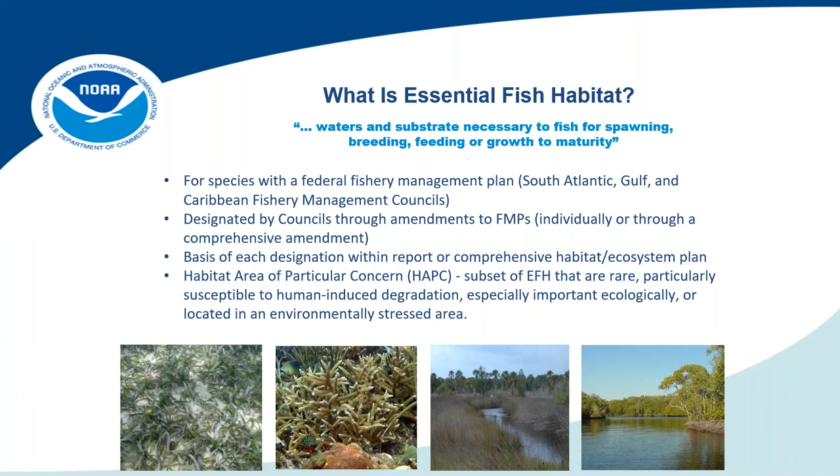So why do we have to protect so many different kinds of habitats? It's basically because any given fish species has a number of different life stages, and typically they will change the habitat they're living in based on what life stage they're at.

When they're first eggs and larvae, they're up in the water column. Then they will settle sometimes into a habitat like seagrasses, where they grow to be juveniles, get large enough, and then they may move off to a habitat like mangroves for a while and get larger still. At some point they become adults ready to reproduce and they'll end up on coral reefs. Because different species use different habitats at different points in their life cycle, we need to protect all those habitats so that the species can complete their life cycle and reproduce.

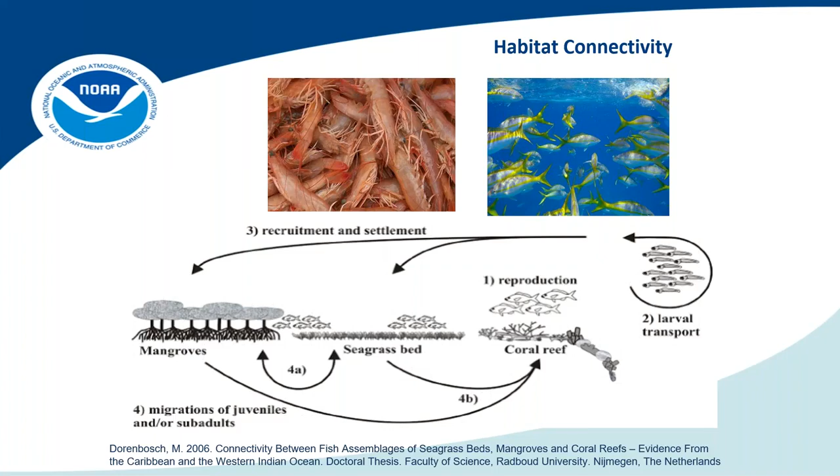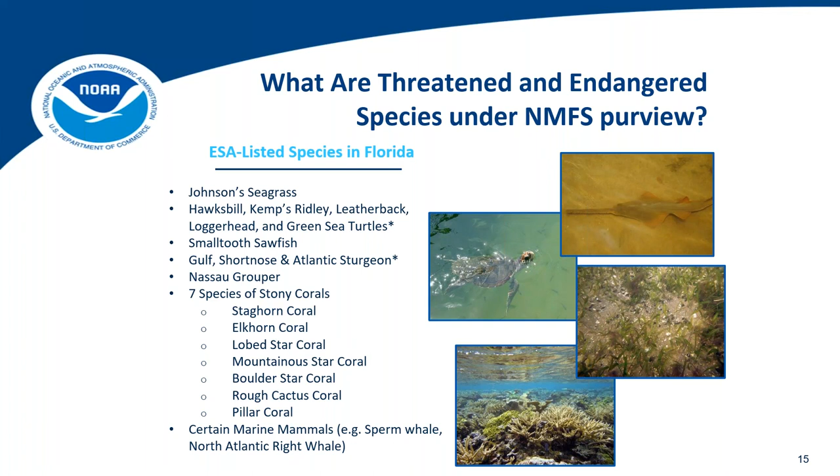So people get kind of baffled about why there's an ESA consultation and then another consultation for EFH. Part of the issue is that those two entities fall under two different pieces of legislation enacted at different points in time. The ESA was enacted first, and then EFH came into being later when they modified the Magnuson-Stevens Act. There's really two different processes, and you're dealing with two different divisions within NMFS when you do these consultations. Now, because of the nature of the funding agreement we have with FDOT, Jen and I do both types of consultations, although that is actually an exception to the rule.

If you were Joe Public going to the Corps to get a permit to build your single family dock, when the Corps comes to us, they would actually be dealing with two biologists, one from habitat conservation and one from protected resources, but that's not the case with FDOT. So it makes things a little smoother. There's more continuity because you're not dealing with two different folks.

EFH and ESA also have different timelines. We usually can get an EFH consultation done in about 30 days. ESA, if you go into formal consultation, that could be as long as 135 days. The other thing is we usually have the information we need to do the EFH consultation earlier in the process than is the case with ESA, because for EFH we just really need a good ballpark idea of how big the impacts would be, how much acreage would be involved, and what kind of resources.

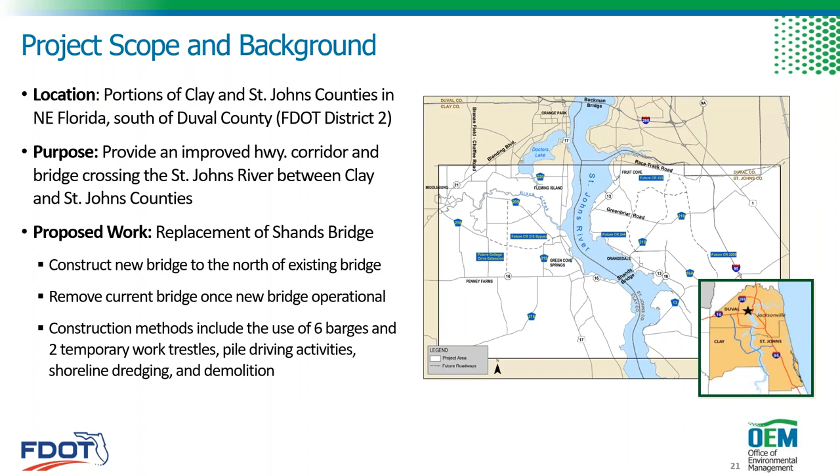Construction on the new bridge is expected to begin in 2022 and be completed in 2029. Construction methods with the potential to affect EFH include barge use, pile driving activities, shoreline dredging, and demolition.

In August 2005, FDOT distributed the advanced notification package to the ETAT agencies, including NMFS, the U.S. Army Corps of Engineers, the U.S. Coast Guard, and St. Johns River Water Management District.

NMFS responded to the advanced notification package as an ETAT member and provided comments through the Efficient Transportation Decision-Making Environmental Screening Tool. NMFS commented on coastal and marine resources, wetlands, and wildlife and habitat. NMFS also commented that the project may directly and indirectly impact EFH, as well as listed species under NMFS purview.

NMFS recommended an EFH assessment to comply with the Magnuson-Stevens Act and a biological assessment to comply with the Endangered Species Act. NMFS also requested avoidance and minimization measures, a stormwater management plan, and a detailed mitigation plan be prepared and provided for NMFS review and response.

FDOT used wetlands identified in the Wetlands Evaluation Report in conjunction with National Wetlands Inventory mapping and NMFS coordination to determine essential fish habitat associated with the wetlands and the tidally influenced waterways, including portions of Black Creek and the St. Johns River. There were several challenges associated with developing the methodology to determine the extent of EFH in the project area.

Some of these challenges were that this project entails a large geographic study area. There were many build alternatives under study, and multiple tidal and non-tidally influenced surface waters exist in the project area. This is important because in addition to submerged aquatic vegetation such as seagrasses, tidal wetlands are considered to be EFH, so this differentiation is used to help quantify potential EFH impacts.

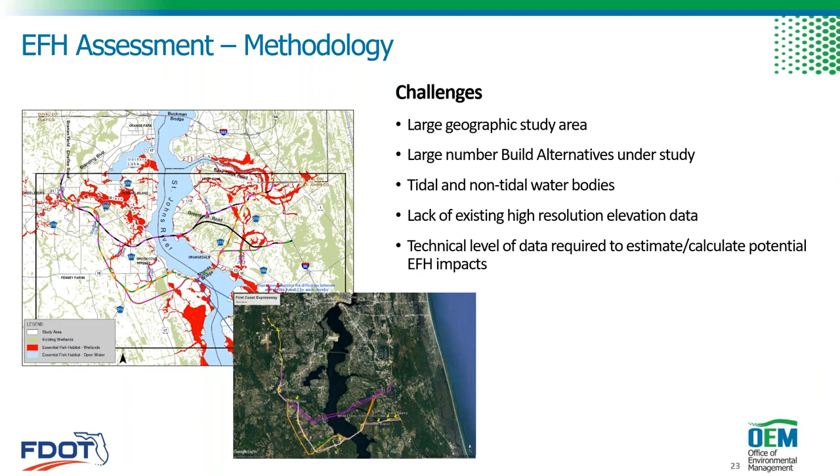In May 2011, the decision was made to utilize a 20-foot topographic contour line as a starting point for determining the extent of potential EFH wetlands. All palustrine forested wetlands which exhibited a hydrologic connection to the St. Johns River and/or its tributaries and were located within or below the 20-foot contour were selected as potential EFH.

Using the same methodology, the wetland areas within each proposed build alternative, as identified in the Wetlands Evaluation Report, were then selected as being potential direct EFH impacts. It was also agreed that the wetlands within the 20-foot contour upstream of a build alternative crossing, such as a river, creek, stream, tributary, associated wetland, etc., could be considered potential indirect EFH impacts for the purposes of this study.

Additionally, DOT conducted a desktop GIS analysis using data from the St. Johns River Water Management District, which were supplemented by field visits to the project area to assess submerged aquatic vegetation in the St. Johns River

Where the respective alternative corridors cross the St. Johns River, in spring 2015 DOT conducted a NMFS-requested tidal gauge study to further determine EFH limits.

The tide gauge studies were conducted at the tidal water body crossings. Biological markers such as the moss and lichen line were used to determine mean high water and seasonal high water elevations. These elevations were marked by surveyors, and then LiDAR-derived contours, as shown on this slide, were drawn to quantify the lateral extent of the floodplain.

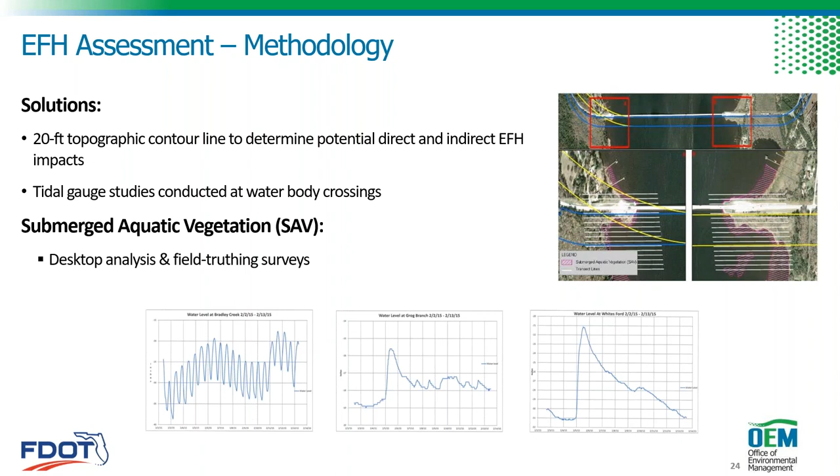Potential EFH, habitat areas of particular concern, and managed species impacts were identified and analyzed as part of the EFH assessment. Several EFH categories were identified in the project area: estuarine emergent wetlands, estuarine water column and bottom, palustrine forested, herbaceous and emergent wetlands, and submerged aquatic vegetation.

Based on the fishery management plans prepared by the South Atlantic and Mid-Atlantic Fisheries Management Councils, federally managed fishery resources with the potential to occur in the project area include the eggs and larvae of brown shrimp, white shrimp, and pink shrimp. In addition, the tidally influenced portions of the St. Johns River and associated tributaries also serve as a nursery for other commercially and recreationally important species, such as Atlantic croaker and striped mullet, and the federally listed short-nosed sturgeon.

These fish also serve as the food source for other species included in fishery management plans, such as the snapper grouper complex and migratory species including tuna and sharks, also managed by NMFS.

The project is currently anticipated to impact approximately 37.97 acres of EFH, including 35.73 acres of tidally influenced freshwater wetlands and 2.24 acres of submerged aquatic vegetation. Minimal temporary construction impacts, including turbidity and sedimentation, are also likely to occur.

DOT evaluated construction techniques during final design to determine the most appropriate technique for constructing structures, and final construction methods were selected as part of the permitting process.

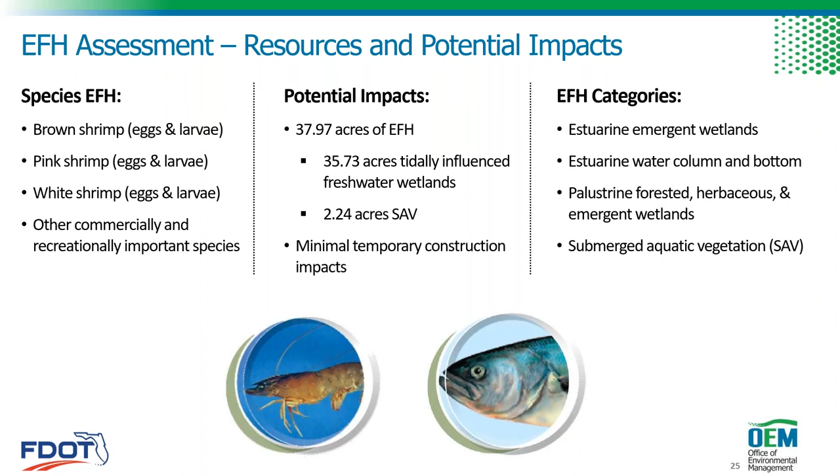FDOT committed to the following actions to avoid, minimize, or mitigate for EFH impacts: evaluating, considering, and implementing design and construction techniques which lead to the continued avoidance and minimization of wetland impacts to include EFH impacts; mitigating all wetland impacts to include EFH impacts as a result of the construction of the preferred alternative; and working with the agencies on developing a regional wetland mitigation plan as the project progressed into the design phase.

This plan would establish procedures, guidelines, and responsibilities to implement regionally significant mitigation for unavoidable impacts caused by the St. Johns River Crossing Project and other future DOT projects within the jurisdictional boundaries of St. Johns River Water Management District.

DOT also committed to continuing to coordinate with the resource agencies in developing the framework for a regional wetland mitigation plan, and mitigating for submerged aquatic vegetation impacts through water quality improvement initiatives. DOT developed a draft mitigation plan as part of the EFH assessment. This plan outlined options for improving water quality by reducing the nutrient loading conditions in areas with submerged aquatic vegetation.

Finally, restoration of the nearshore areas upon the removal of the existing Shands Bridge. Although many of these measures pertain to development of the mitigation plan, DOT was able to implement some of the avoidance and minimization measures during design.

These included reducing the proposed right-of-way requirements, adjusting the alignments to avoid major wetland systems, and selection of pond sites such that little or no wetland impact would occur.

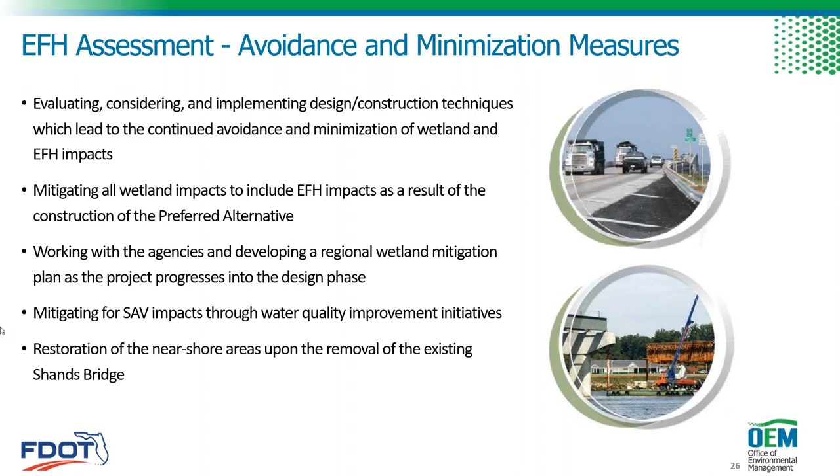NMFS provided conservation recommendations in 2010 as part of the NMFS response to the draft environmental impact statement. DOT provided an interim response within 30 days of receiving the EFH conservation recommendations. Numerous informal meetings were then held with NMFS to further refine the methodology and process for estimating and assessing potential impacts to EFH for the build alternatives.

DOT also committed to continuing coordination and consultation with NMFS as the project progressed toward the final design and permitting phases. In fall 2017, NMFS provided permit-specific conservation recommendations as part of the response to the public notice for the Corps permit application. These conservation recommendations, which included mitigation plan requirements such as the description of success criteria, cross-sections of the mitigation areas, and a vegetative planting plan for the mitigation sites, did not come as a surprise to DOT since coordination had been ongoing for years.

Instead, these conservation recommendations served as formal documentation of the mitigation plan requirements that were already being discussed as part of DOT's coordination efforts. In March 2018, after submittal of the detailed mitigation plan for offsetting unavoidable impacts to EFH and non-EFH wetlands, NMFS prepared a letter documenting that the permit applicant, in this case DOT, had met its responsibilities under the Magnuson-Stevens Act and the regulations for implementing the EFH provisions of the Act. With this letter, EFH consultation for the First Coast Expressway project was officially completed.

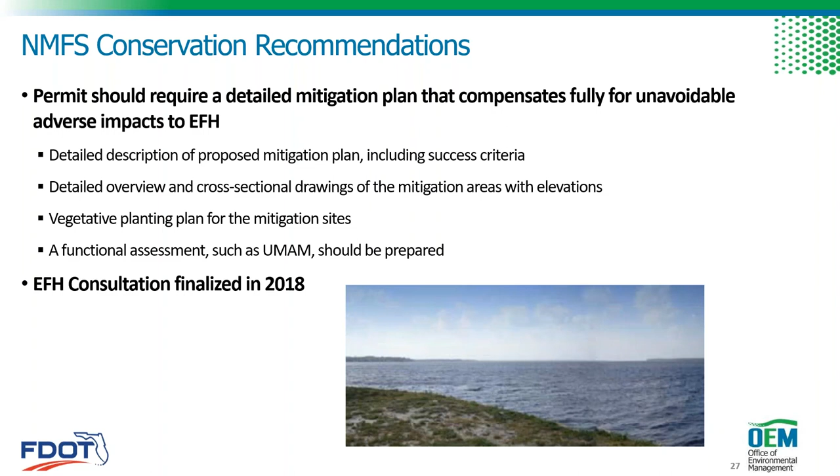During the permitting of the project, DOT requested NMFS ESA consultation for protected species and their designated habitats under NMFS jurisdiction. NMFS initiated ESA Section 7 consultation in April 2018.

The Endangered Species Biological Assessment prepared in 2012 concluded that the potential for short-nosed and Atlantic sturgeon to occur within the project area is low, and the project is not located in designated critical habitat for these species, and that no impacts are anticipated to these species as a result of the project.

Temporary and permanent habitat alterations may result in impacts to the available foraging and refuge habitat for sturgeon that may be in the area, but due to the low likelihood of occurrence in the project area, these impacts were determined to be insignificant. No significant noise or vibration impacts are anticipated to the sturgeon as a result of jetting, augering, or pile driving.

Therefore, an effect determination of may affect, not likely to adversely affect, was made for both the short-nosed and Atlantic sturgeon. A NMFS Section 7 checklist for the Shands Bridge documented proposed construction methods determined during the design phase, including pile driving ramp-up procedures consisting of initial operation at low power levels with a gradual increase to the minimum levels required for pile installation.

Protection and conservation measures will also be implemented for sturgeon. In June 2018, NMFS concurred that the project is not likely to adversely affect ESA listed species under NMFS purview. NMFS noted that consultation must be reinitiated if a take occurs or if new information reveals effects of the action not previously considered.

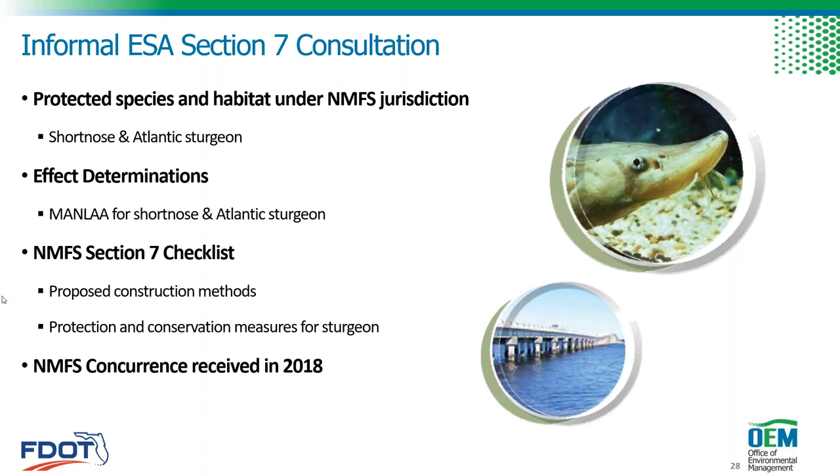Due to the complexity of this large project, there were several challenges to development of the mitigation plan. First, multiple resource and permitting agencies were directly involved in coordinating and developing viable mitigation options. It can be challenging to coordinate with so many agencies at once, but this strategy was beneficial because the individual agencies were able to help ensure that the final mitigation plan addressed all agency requirements.

Due to the high amount of EFH impacts anticipated, there was also concern that the number and type of mitigation credits required might not be available when needed. This is a common challenge for DOT projects in the eastern portion of the state, so it is always a good idea to consider multiple mitigation options that can serve as backup if credits are not available when needed. In this way, negative impacts to the project schedule can be avoided.

Finally, all agencies involved in development of the mitigation plan agreed that due to the large, complex nature of the project, a regional wetland mitigation plan was needed. The agencies agreed upon several location requirements for the mitigation plan. Mitigation banks should be located within close proximity of the project, and any mitigation areas must be regionally significant, under demonstrated development pressures, and beneficial to the establishment of high-quality, uninterrupted habitat linking natural and preserved areas throughout the Northeast Florida region.

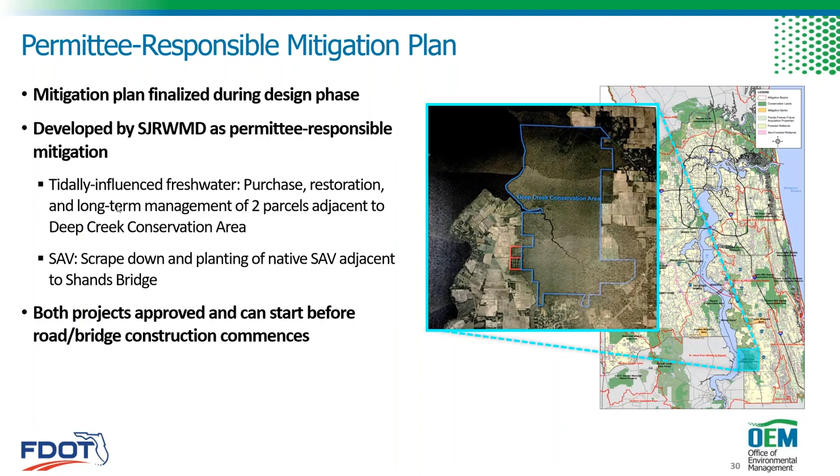For both mitigation projects, the St. Johns River Water Management District provided suitable work plans and monitoring plans that have explicit, measurable success criteria and call for adaptive management if it appears success criteria are not being met. Both mitigation projects have been approved and will start prior to commencement of road and bridge construction.

It should be noted that EFH and ESA coordination with NMFS took place over more than a decade. NMFS responded to the advanced notification package in 2005, participated in field reviews in 2008, and reviewed the draft EIS and responded with conservation recommendations in 2010. In May 2011, NMFS and DOT agreed on using the 20-foot contour to delineate EFH for the EIS process.

Extensive coordination continued through 2013 when NMFS reviewed the final EIS. In spring 2015, DOT conducted that NMFS requested tidal gauge study referenced earlier, and in November 2015, NMFS and DOT completed the field assessment for establishing the extent of EFH. As discussed previously, this method used the seasonal high water elevation for establishing EFH boundaries and replaced the interim method that used a 20-foot contour line.

The EFH and submerged aquatic vegetation mitigation plan was then finalized and submitted in 2017. In March 2018, NMFS provided the concurrence letter, thus completing EFH consultation for the First Coast Expressway project. The Corps and St. Johns River Water Management District permits were obtained in 2018, and construction is anticipated to begin next year in 2022. As you can see, this project took place over a long period of time.

Three different NMFS habitat specialists were involved in reviewing the First Coast Expressway project, but thanks to thorough coordination efforts and a clean project file, NMFS was able to seamlessly hand off the project from one biologist to the next. This is why it is so important to coordinate often with NMFS during consultation, and why it is so crucial to maintain a robust project file throughout the development of a project.

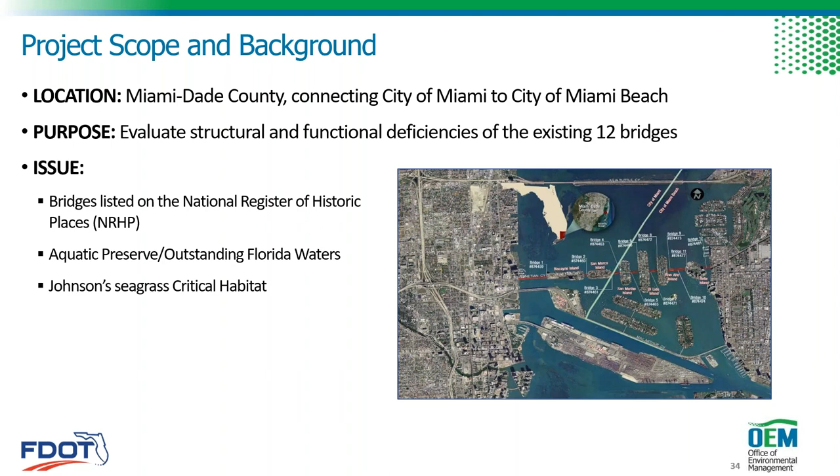Therefore, the study had to balance potential impacts to the marine environment, the historic character of the bridge as it's listed on the National Register of Historic Places, and also ensure access for the residents which reside on the residential islands throughout the causeway.

The causeway is owned and operated by Miami-Dade County, and it's off the state highway system. So in this case, DOT is conducting the PD&E study in coordination with the county, and we've invited the U.S. Coast Guard and U.S. Army Corps of Engineers as cooperating agencies.

The county will then be responsible for design and building the project, and they'll also be responsible for the NEPA reevaluation and the permitting. DOT will remain involved through a LAP agreement as the county will seek federal dollars for construction in the future. We're currently evaluating 3 alternatives for additional study, which include the no action, bridge rehabilitation, and bridge replacement. The replacement alternative will be shown as the preferred alternative at our upcoming public hearing this spring.

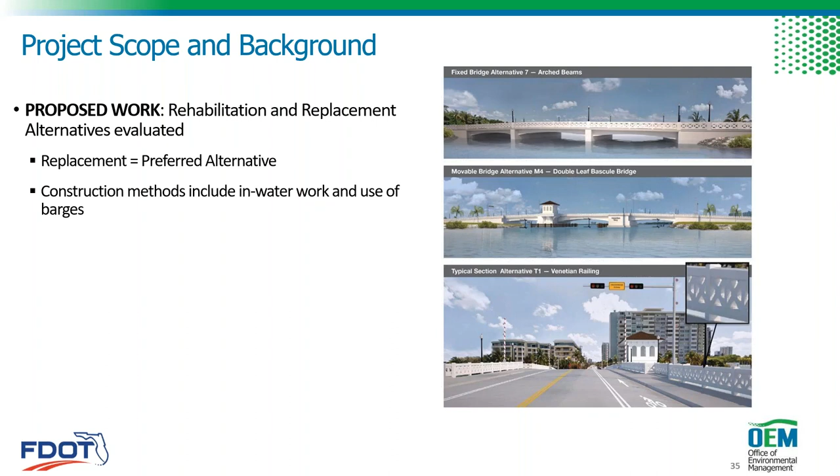So the advance notification package was originally submitted for comment back in 2011. Agency coordination continued and the ETDM programming screen summary report was published in 2016. During the ETDM screening, NMFS indicated that Biscayne Bay was in the project area.

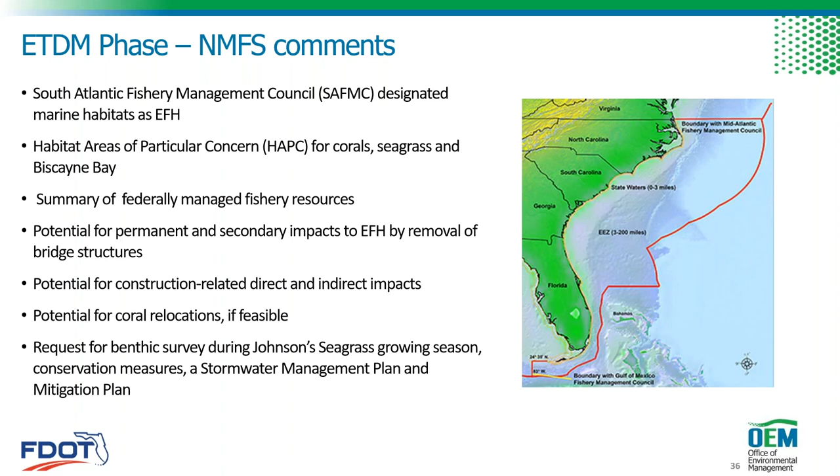There's moderate to high quality essential fish habitat types throughout the area. NMFS requested the relocation of corals as feasible and requested the DOT also consider the relocation of barrel sponges as an EFH avoidance and minimization measure, and indicated less mitigation will be required if sponges and corals could be relocated. And ultimately, a determination of substantial for coastal and marine environment was determined.

So our analysis began with a desktop review of the EST and the NMFS EFH mapper to identify the different types of essential fish habitat areas of particular concern, and species usage.

The EFH types we have in our project area include sand and shell bottom, corals, macroalgae, sponges, and seagrass, which provide foraging areas for managed fish species, manatees, sea turtles, invertebrates, as well as shelter and habitat for post-larval and juvenile fish species. Biscayne Bay is also considered an outstanding Florida water, which means it's subject to additional protection measures.

And the area is designated as critical habitat for Johnson seagrass by NMFS and designated critical habitat for the West Indian manatee by U.S. Fish and Wildlife Service.

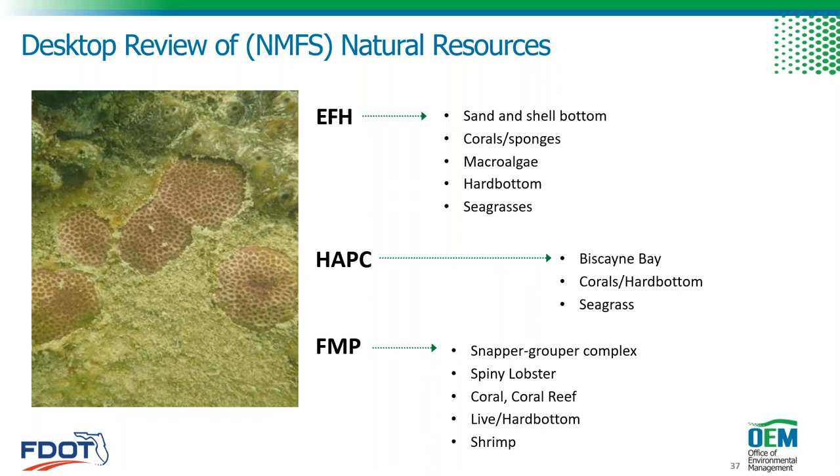So we went ahead and conducted our original benthic survey in 2014. However, due to project delays, we resurveyed the area in 2017, as NMFS prefers that the EFH assessment be based on a more recent survey. And we did find that the results between the 2 surveys, although 3 years apart, were consistent.

Our survey included the area beneath the bridges, as well as 60 feet to the north and south of the face of the existing bridges. And that was to identify any potential resources that could be impacted by potential widening or by construction equipment such as barges or marine vessels during construction.

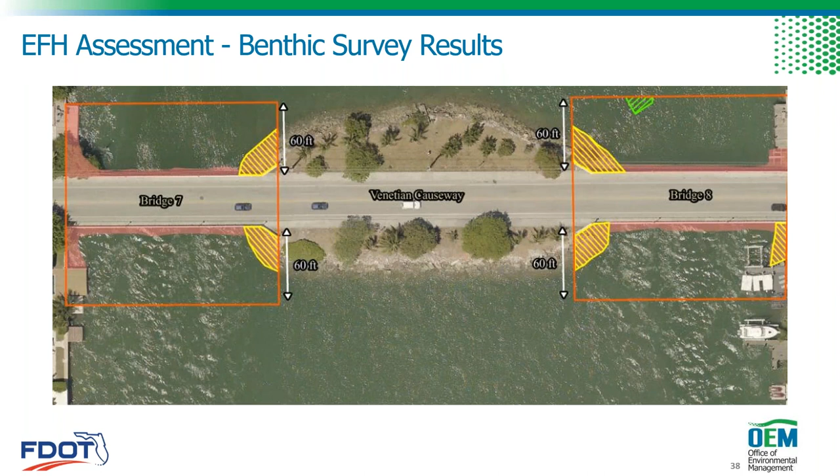We found 3 different community types during our benthic surveys. This is an example of community 1, which was made up of the shallow subtidal zones, bridge structures, and riprap areas, which were observed at the east and west terminus of each bridge, along the bridge pilings and the fenders.

These areas provided substrate for hard and soft corals, mollusks, and crustaceans. Hard corals were typically small, isolated Siderastrea type species or other corals less than 10 centimeters in size. The corals were limited to the existing riprap areas around the seawalls and the small fill islands, and none were found on the actual bridge pilings themselves.

Community number 2 was a deeper water environment with sandy bottom and with shell fragments, which was observed about 5 to 15 feet from the bridge edges. Within this area, we had a varying coverage of macroalgae, sponges, octocorals, and tunicates.

Community number 3 was made up of our seagrass patches, which we observed at 7 out of the 12 bridges in very small, isolated patches, consisting mostly of paddle grass. These were observed at the 55 to 60 foot mark from the existing bridge edges and accounted for less than 1% of our survey area.

We anticipated direct impacts to the benthic habitat from both build alternatives, the rehabilitation and the replacement. However, we consulted on the replacement alternative, which had the larger footprint of impact. Direct impacts to essential fish habitat would result from removal and construction of the bridge substructure, including removal of existing piles to 1 foot below the mudline, dredging to remove the existing bascule pier, and installation of the new substructure using drill shafts. The area anticipated to be directly impacted is mainly limited to sponge, octocoral, and tunicate communities located on and adjacent to the bridge pilings and directly beneath the bridge edges.

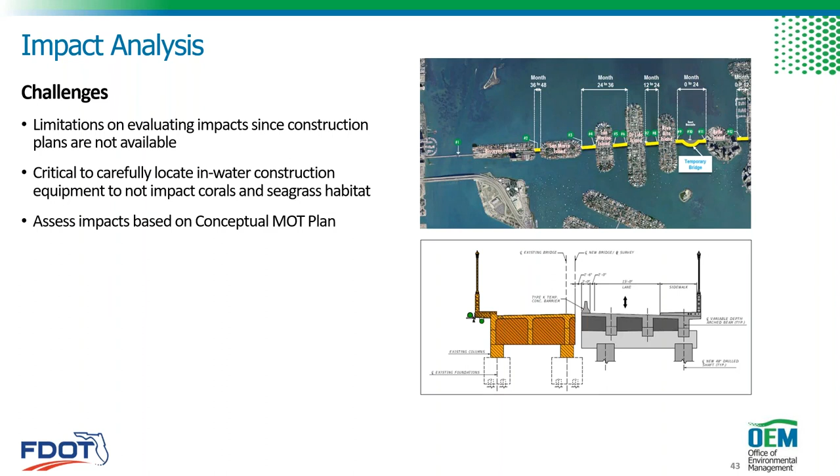Following our impact analysis, we evaluated steps to avoid and minimize impacts, which is a much more effective strategy than compensatory mitigation later. DOT recommended the following steps to avoid and minimize impacts as part of our natural resource evaluation. These are all best practices that can help keep the consultation process going.

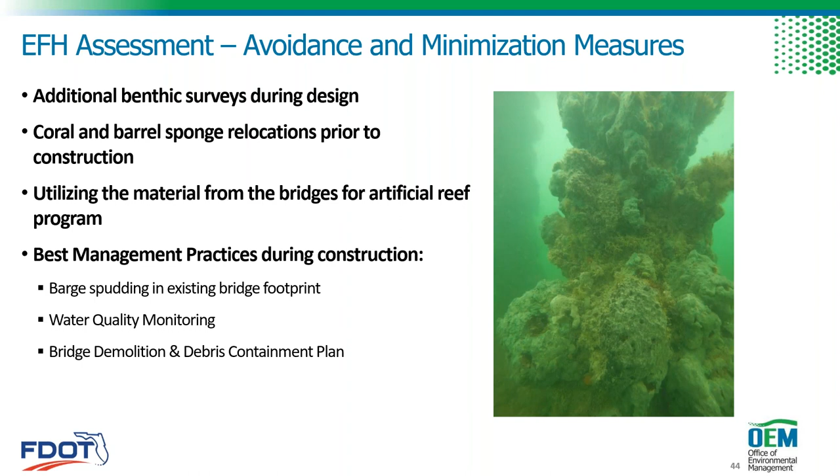We can propose to conduct additional benthic surveys during design, which would identify any new resources since PD&E. We propose to develop a detailed coral relocation plan during design and include any relocation of viable barrel sponges. We proposed to coordinate with Miami-Dade County to use the material from the bridge demolition in their artificial reef program. We also looked at implementation of best management practices during construction related to water quality protection, monitoring, and debris containment.

In response to our natural resource evaluation and as part of the conservation recommendations development, NMFS agreed with those avoidance and minimization measures, but recommended additional measures, such as delineating the seagrass beds found beyond the work zone with surface buoys during construction so that barges and boats would avoid impacting those beds while accessing the site. They also requested a standalone conceptual mitigation and relocation plan that would identify the species of corals to be relocated, a preliminary relocation site, and confirm that DOT would follow the FWC guidelines for relocation.

So DOT prepared this plan and then committed to revising it and preparing a detailed plan during design once a detailed coral inventory was available. NMFS also recommended that impacts to hard bottom or coral impacts due to barge spudding be further evaluated during design.

And what we found in this process, working with the NMFS liaison, is that there are different approaches to getting EFH done in the PD&E phase. As Joy mentioned, you can engage your liaison in that decision-making process. The level of detail and information available during PD&E can vary for each and every project, and that's going to direct what can be done now versus what can be finalized in later phases, and then documented in the NEPA commitments to provide those agencies with assurances that the process will continue as planned.

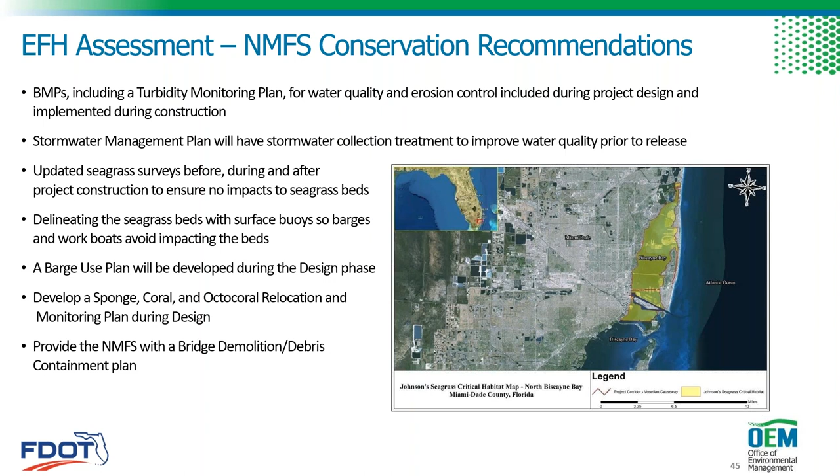No Johnson seagrass was found during either of our benthic surveys, but we are still entirely within their critical habitat. Therefore, we entered into formal consultation for unavoidable impacts to Johnson seagrass critical habitat, and a determination of may affect, likely to adversely affect, but not likely to destroy or adversely modify Johnson's designated critical habitat was documented in a biological opinion issued in November of 2020.

The remainder of the species determinations were either no effect, may affect not likely to adversely affect, or not present.

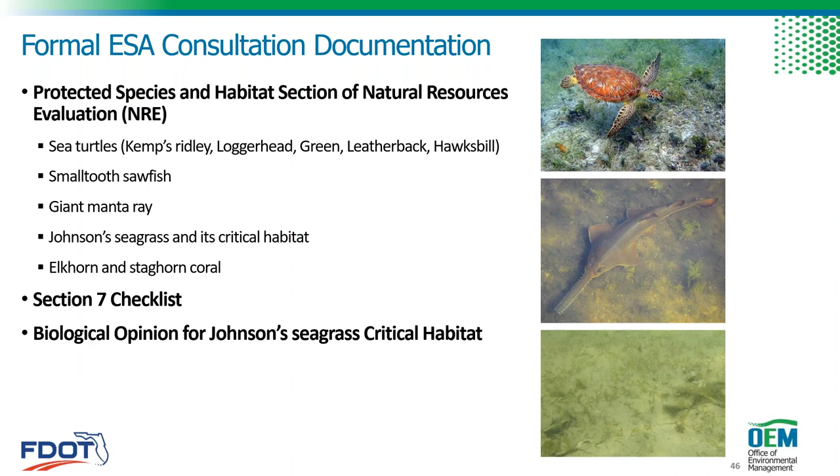Coordinating the ESA and EFH review process requires a careful look at what information you have available and also at the project schedule. In some cases, it may make sense to submit your NRE when not all details are ready for either agency. With Venetian, although our NRE was not considered complete by NMFS at the time of submittal, we had enough to complete our informal consultation with U.S. Fish and Wildlife Service.

So the process with Fish and Wildlife was complete by October of 2019. We then moved on to working with our liaison to gather additional information, and in December of 2019, our NRE was accepted by NMFS to begin consultation. At that point we began our EFH consultation, went back and forth to develop conservation recommendations, and concluded that process in March of 2020.

However, our formal ESA consultation did not actually initiate until June of 2020. That gap in time was so we could work with our liaison to gather enough information on construction, materials, and methodology to satisfy the reviewers' informational needs.

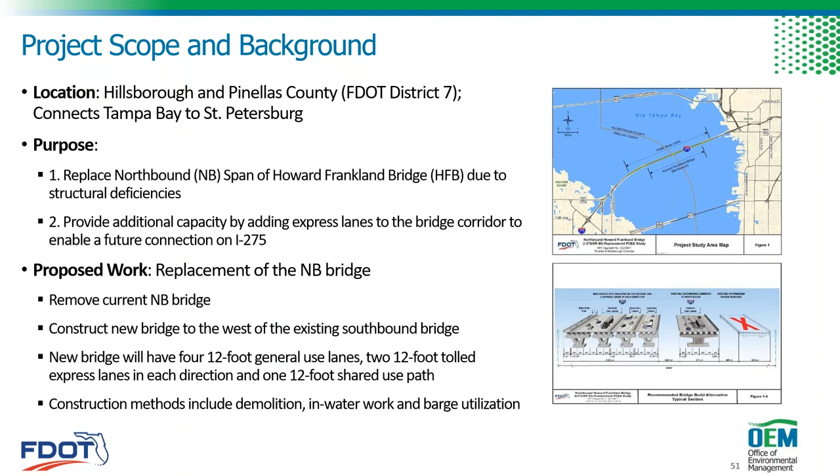During the ETDM phase of PD&E, NMFS conducted a GIS analysis and an on-site field inspection. NMFS commented that EFH, including mangroves and submerged aquatic vegetation in the form of seagrass, is present in the project area. Based on the presence of EFH, NMFS noted that EFH consultation, including an EFH assessment and benthic resource surveys during the science-based seagrass growing season of June to September, would be required. NMFS also recommended ESA Section 7 consultation, and coordination on both EFH and ESA were handled together for this project.

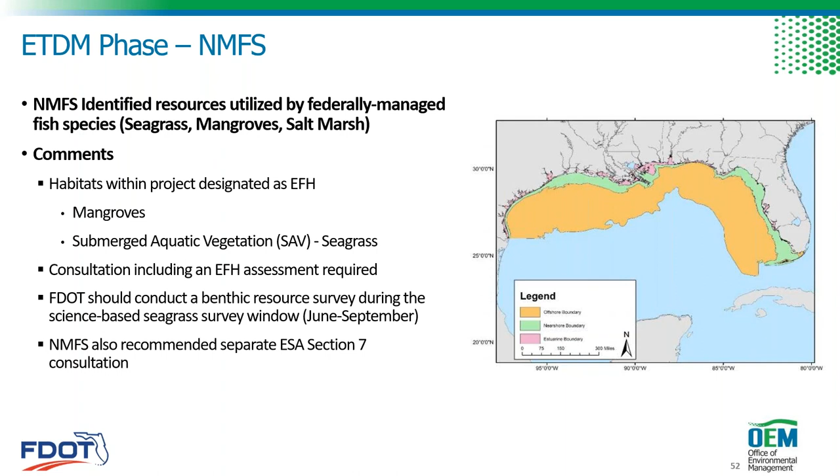Benthic surveys were completed during the 2011, 2013, and 2016 seagrass growing seasons. These field reviews confirmed mangroves and seagrass, including shoalgrass, turtlegrass, and manatee grass, in the project area. Continuous seagrass was observed along the shallow plateau that extended from the embankment to approximately 100 to 150 feet out. The water in this area was only around 5 to 10 feet deep, which provides good conditions for seagrass growth. The observed seagrass was less dense along the embankments of the causeway, likely due to wave action, which makes it difficult for seagrass to establish.

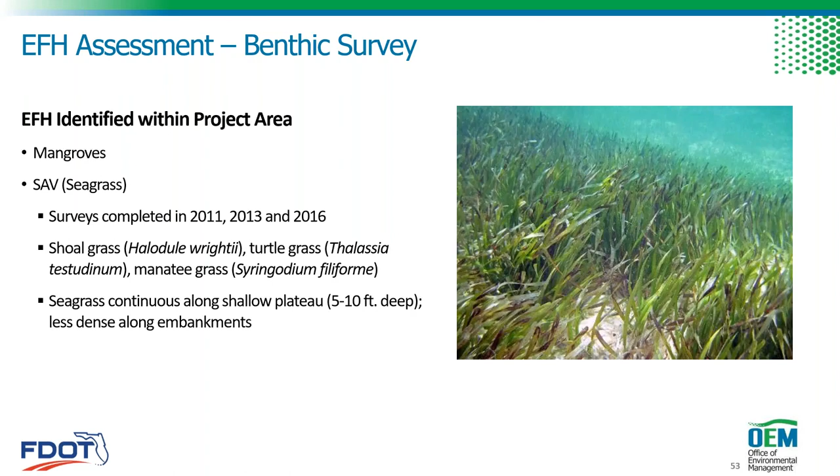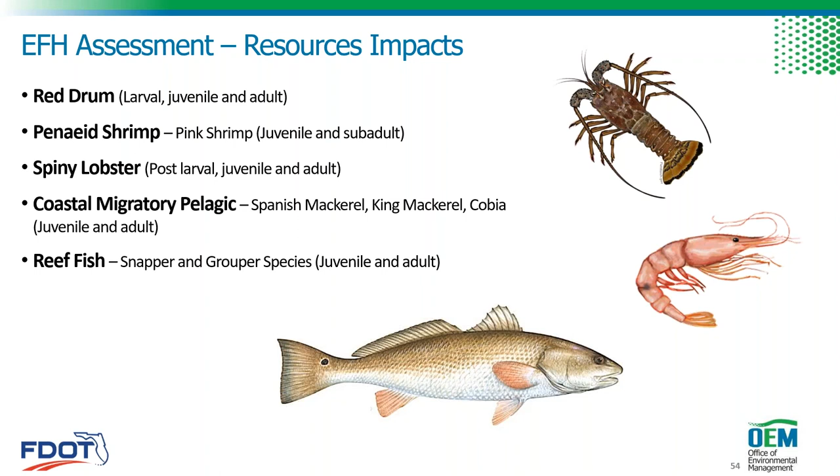It should be noted that although red drum was federally managed at the time of the EFH assessment for this project, the species is no longer federally managed, so NMFS no longer considers its life stages when determining which species are supported by EFH in a project area.

Based on the scope of work, no impacts are anticipated to the mangroves in the project area. However, temporary water quality degradation, such as turbidity, may occur due to demolition of the current bridge, as well as the construction of new pilings required to expand the causeway. Overall, no net loss caused by displacement is anticipated.

Based on the project footprint and locations of seagrass mapped in 2016, 9.5 acres of impacts to this EFH resource are anticipated. In order to minimize impacts, DOT will adhere to a variety of avoidance and minimization techniques.

The first step to avoid impacts was choosing an alignment that would decrease construction complexity and time. During construction, seagrass areas not anticipated to be directly impacted by the project will be delineated utilizing buoys, barriers, or other methods to alert contractors of these sensitive areas and avoid potential impacts from barge staging or spudding. Furthermore, best management practices such as phased construction, turbidity barriers, and silt fences will be utilized to avoid water quality issues with Old Tampa Bay, which is an outstanding Florida water as mentioned previously.

DOT plans to utilize credits from the Old Tampa Bay Water Quality Improvement Project to mitigate unavoidable seagrass impacts associated with the project.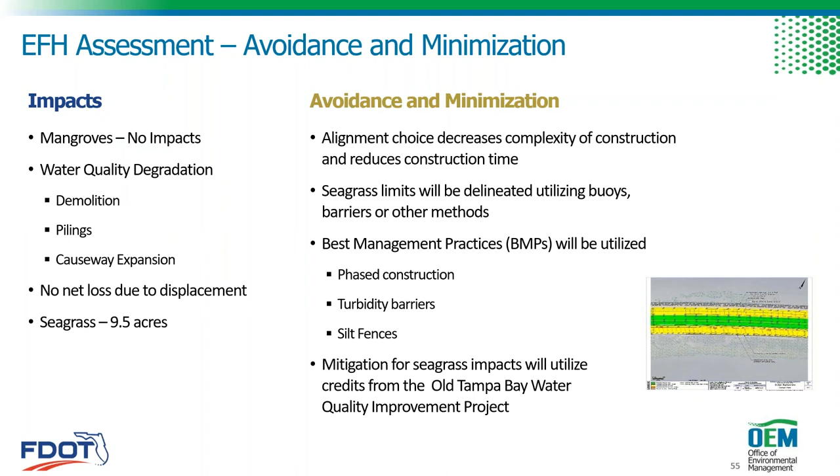The Old Tampa Bay Water Quality Improvement Project is an innovative mitigation project located at the Courtney Campbell Causeway. A portion of the causeway was converted to a low-level bridge to create a tidal connection in the northern portion of Old Tampa Bay, resulting in decreased water stagnation, increased tidal flushing, stabilized salinity, and lowered dissolved nitrogen levels. The increase in water quality has created a first-of-its-kind water quality credit bank for stormwater management that can be used for future FDOT projects that drain into the bay.

Along with water quality improvements, natural seagrass recruitment in the area has also established a seagrass mitigation site reserved for future DOT mitigation needs. DOT proposed utilizing the Old Tampa Bay Water Quality Improvement Project as mitigation for seagrass impacts associated with the Howard Franklin Bridge project.

This mitigation plan was contingent on the success of the site. To date, approximately 20% of the available mitigation credits have been released for use as water quality has been restored in the area. The remaining credits will be released in the near future as marine seagrasses continue to establish. The success of this project has also led DOT to acknowledge similar mitigation strategies as a best practice when feasible.

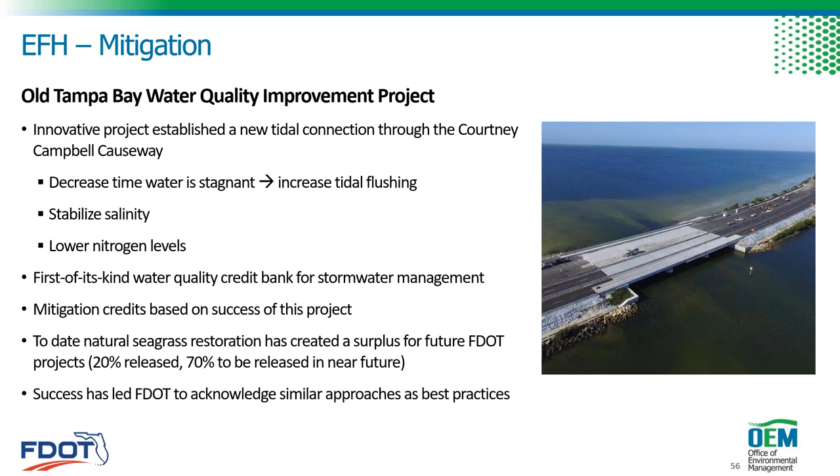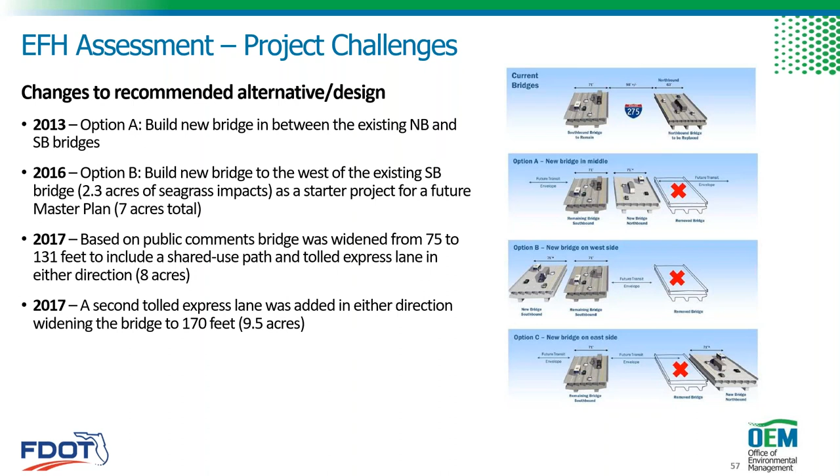One of the major challenges faced during the PD&E process was the number of design changes. Over a 4-year period, 4 major design changes occurred, consisting of 2 changes to the proposed bridge location and 2 separate changes to the bridge typical section that resulted in additional widening. These changes in the recommended alternative led to increases in seagrass impacts each time and required multiple reinitiations of EFH consultation with NMFS.

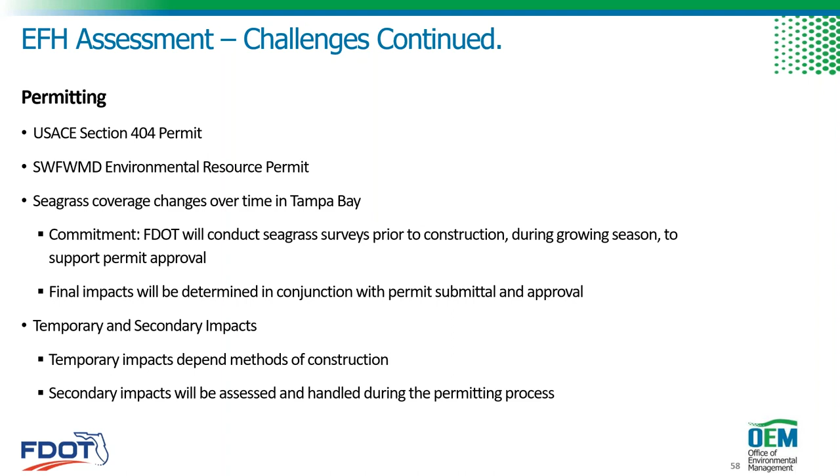Another challenge faced, although not unique to this project, is the interconnectivity of project-associated seagrass impacts, EFH coordination, and the permitting process. Accurate seagrass impacts are required for permits, such as the Corps 404 permit and Southwest Florida Water Management District ERP permit, which are acquired after NMFS consultation but before construction. As seagrass coverage changes over time in Old Tampa Bay, sometimes drastically, DOT committed to conducting benthic surveys prior to construction. These surveys are necessary to support permit submittal and approval.

During the PD&E process, NMFS also requested consultation for species and habitat protected by Section 7 of the ESA under NMFS jurisdiction. These species include smalltooth sawfish and swimming sea turtles. A may affect, not likely to adversely affect, species determination was made for all species.

DOT also made commitments regarding construction methodology, such as only conducting in-water pile driving activities during the day, as well as using pile driving ramp-up procedures consisting of initial operation at low power levels with a gradual increase to the minimum levels required for pile installation.

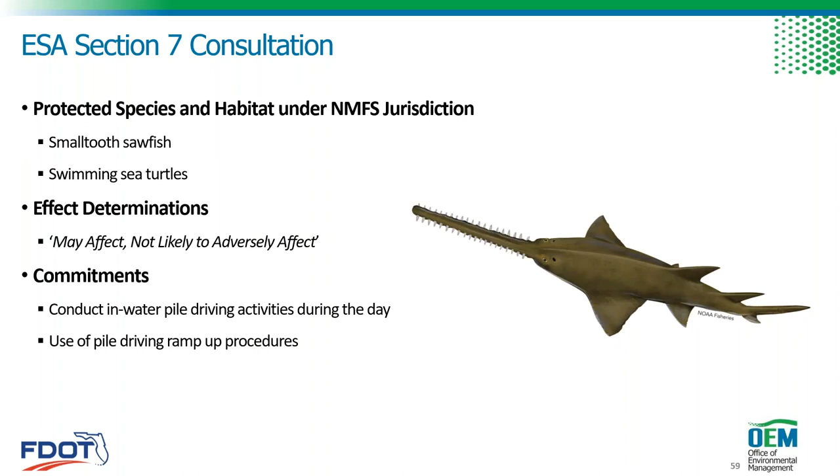From start to finish, coordination with NMFS regarding EFH and ESA took 5 years. During this time, coordination with NMFS was reinitiated to discuss project changes and provide updates on seagrass impacts associated with those changes. Final concurrence was received on January 18th, 2018.

In summary, initiating early, ongoing coordination is important as it provides sufficient time to coordinate project changes and provides ample time for agency review and guidance. NMFS understands that project details change all the time, so keep in mind that the most important thing is to keep communicating throughout project development, design, and permitting to ensure that NMFS is kept in the loop regarding any project updates or changes as needed.

Although EFH coordination for the project is complete, seagrass surveys are also required to support and finalize the permitting process. Reinitiation may be required based on changes to seagrass impacts and finalization of construction methods.

One final takeaway from this project is that DOT's innovative approach to restoration at Courtney Campbell Causeway has created a new approach to handling water quality and seagrass impacts and has created a viable mitigation bank for future DOT use. This type of innovative thinking when developing mitigation plans has the potential to benefit not only the project, but also future projects and management practices.

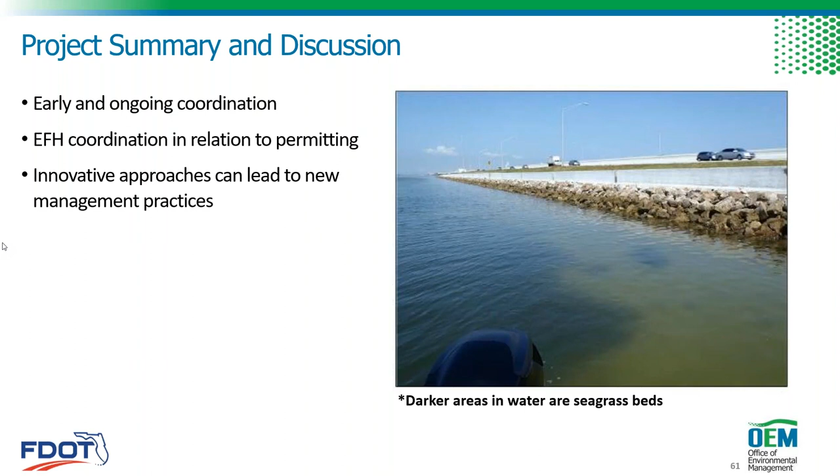At this time, I would like to discuss minor project considerations. We've discussed three major projects, but what about those minor projects? What do you need to consider?

Here are a few thoughts to keep in mind for minor projects. Coordination is still required for federal projects or projects requiring a federal permit that may involve EFH and ESA. Projects with federal funds or on the interstate system will have FDOT as the lead. State-funded projects will have either the Army Corps of Engineers or the Coast Guard as the lead. Minor projects do not have a planning phase, therefore they go directly into the design phase. Minor projects can have abbreviated or inflexible schedules.

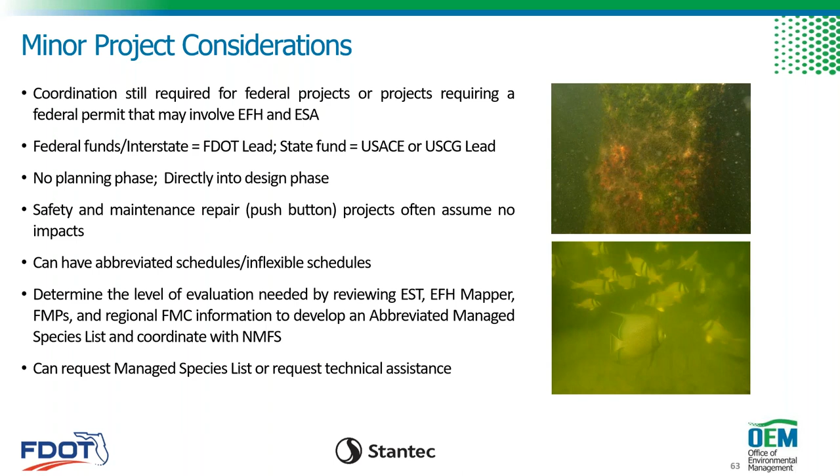Safety and maintenance repair projects, sometimes called push-button projects, often start off with the assumption of no impacts. However, this needs to be confirmed. To determine the level of evaluation needed, check the environmental screening tool, use the National Marine Fisheries EFH mapper, and review the fishery management plan and regional fishery management council information to develop a managed species list and determine potential impacts.

Typically, FDOT does not control what mechanisms the contractor will choose to use, so it can be a challenge to get to the level of detail needed for EFH consultations. The NRE is completed prior to permit applications being prepared, and EFH concurrence is received prior to permit applications when FDOT is the lead. For projects when the Army Corps is the lead, the Army Corps will consult with NMFS. The environmental liaison should notify the project manager that once the NRE has been sent, any changes in design may result in having to reconsult.

Overall, the level of detail provided in EFH assessments should be commensurate with the anticipated impact of the proposed action.

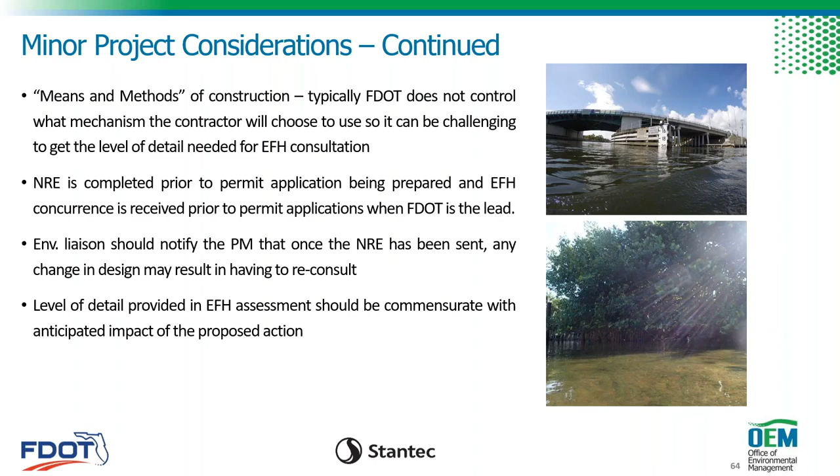So at this time, I'd like to go back over those 10 EFH activities. As mentioned earlier, we have worked to weave into this presentation these 10 key EFH activities.

We've discussed technical assistance as a means to seek guidance from NMFS. We've examined how the 3 case examples perform detailed assessments to determine the level of EFH impacts. We discussed what each of the projects included in their consultation packages with the objective of acquiring a federal permit. We've reviewed the timeframes that occurred with each of the projects.

Dave reviewed and we saw project examples of the differences between EFH and ESA consultations. We have heard discussions on mitigation strategies and included an innovative example on the West Coast. We learned about the conservation recommendations for the projects, and we have discussed how modifications to projects later in design and after coordination may require re-consultation with NMFS.

I'd like to move to our EFH overview where our speakers can discuss these or other important EFH activities. Maybe Jen can start us off with her thoughts on this.